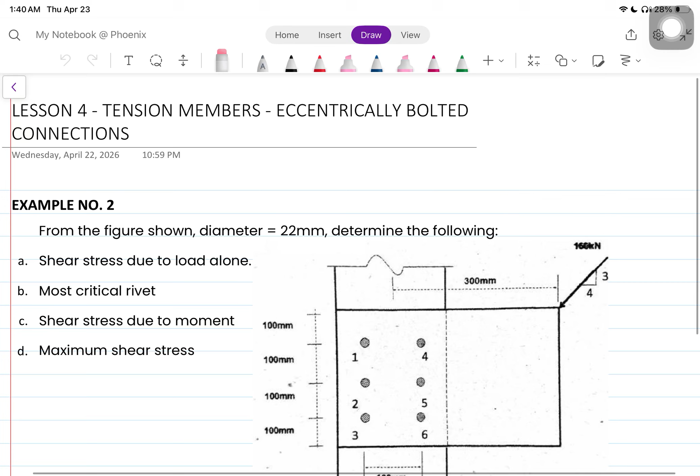Let us have another example for eccentrically bolted connection. This is example number 2. From the figure shown, diameter is equal to 22 mm. Determine the following: A, shear stress due to load alone; second, the most critical rivet; third, the shear stress due to moment.

Okay, so given to us is a slanted load with the load of 160 kilo Newton. Let me rewrite this, 160 kilo Newton. We already have the slope of 3, 4, and then the hypotenuse will be 5.

So we can solve first for the vertical and horizontal load of this. We need to get the components. Let us solve first for the vertical. Since it is acting downward, how do we solve for this? This is 160 times the slope of 3 over 5, and this will be equal to 96 kilo Newton.

And then for our horizontal load, since that will be acting to the left, this will be 160 multiplied by the slope of 4 over 5, and this is equivalent to 128 kilo Newton. Okay, so now for letter A, let's find that using due to load alone.

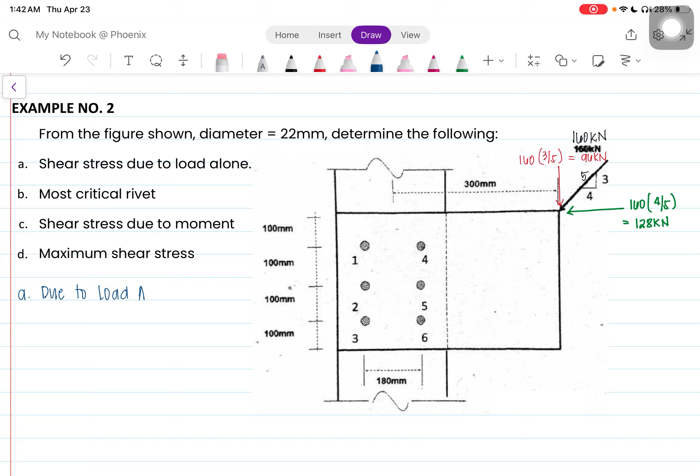How do we solve for that? We divide the total load by the total number of the bolts. So let's start with PH. We solve PH by taking 128 kilo Newton divided by the number of bolts, which is 6. So 128 divided by 6 is equal to

21.333 kilo Newton. Let us store this to letter A. Then, aside from PH, let us solve now for PV. How do we solve for PV? That is just equal to 96 divided by 6, and that is equal to 16 kilo Newton.

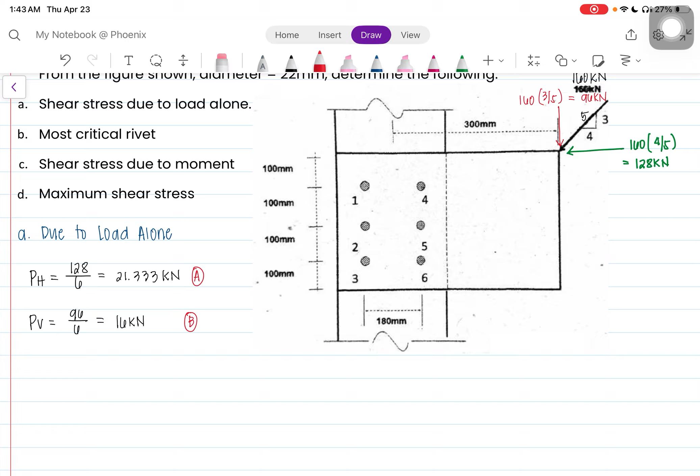Let's store this to letter B. Later we'll just use letters. But we're not done yet with shear stress due to load alone because we still have to solve for PD, the total PD. How do we solve for that? That is just the square root of PH squared plus PV squared.

Substituting the given values, where are they? They are at A and B. So that is A squared plus B squared, but don't forget, it's under a square root. Then we get the value of PD is equal to 80 over 3, or equivalent to 26.667

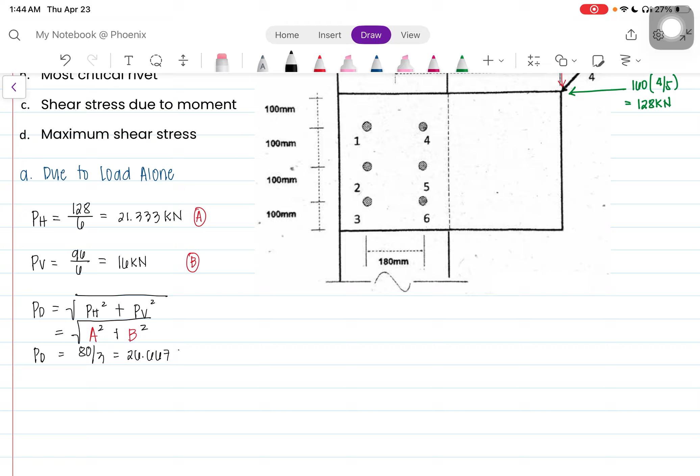kilo Newton. But take note, what is being asked from us? That is the shear stress. So we still have to solve for the shear stress. So to solve now for shear stress, that is just equal to

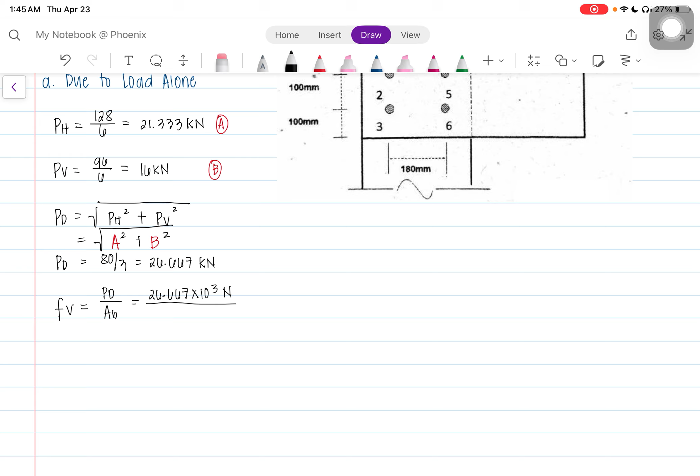PD over area of the bolt. What is our PD? That is 26.667, so take note, use the full value. Here I just wrote down what I noted. And since this is in kilo Newton, we multiply it by 10 cube to convert to Newton. Divide it by, okay, do we have the area of the bolt already? Yes, we have the diameter of the bolt, and that is 22 millimeter.

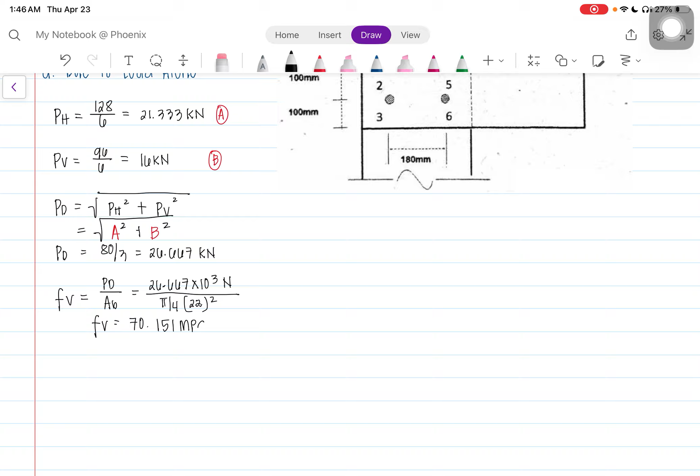So how do we solve for the area? That is just pi over 4 multiplied by the diameter squared. So with that, we can now solve for our FV, that is equal to 70.151 megapascals, and that is now our final answer for our FV.

Okay, let's also draw this out. What does our load look like? Here we have acting upward since the load is acting downward. So this is your PV, PV, PV, another PV, PV, PV. And then for our PH, since the load is acting to the left, it should be to the right here. So that is your PH.

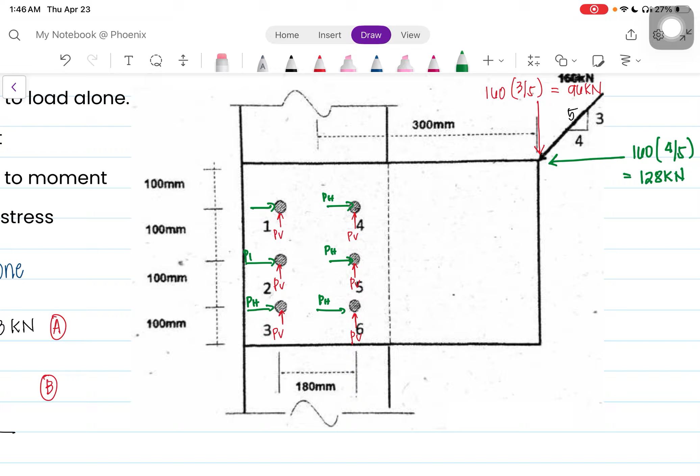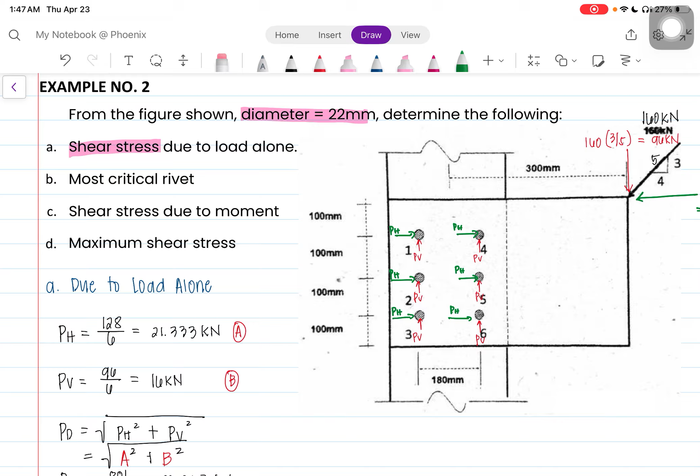Now, the next question to us is the most critical rivet. We can determine the most critical rivet by observation. First, we already have the load due to the direct load. Now for the moment. So to solve for the moment, to know how the rotation will be, let's first solve the value of moment. This means we go back to the question in letter B, the most critical rivet.

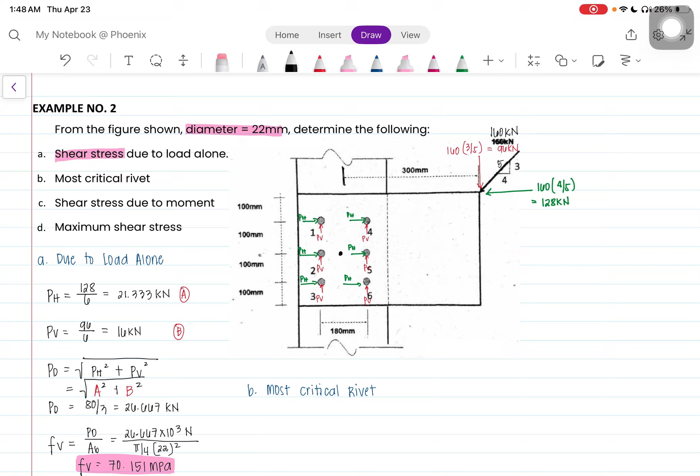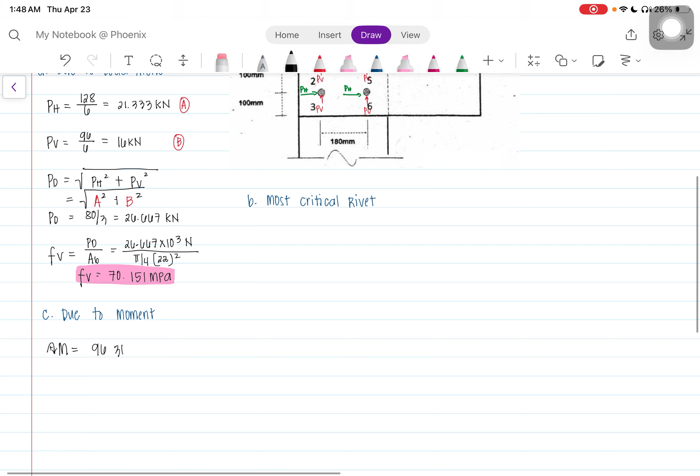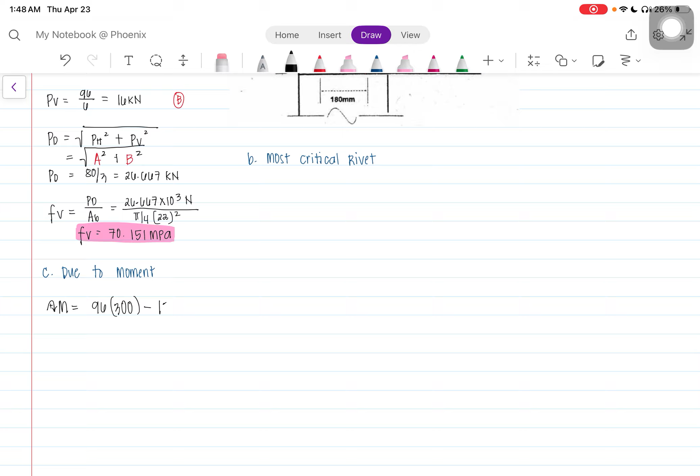So first, 160 kilo Newton acting downward, therefore that is positive. So that is 96 kilo Newton, and our eccentricity is given as 300 mm. Next, what about the 128 kilo Newton? Since that is against the rotation, therefore that is negative. And what is the moment arm? From here going to that side, we have 100 plus 100, so this is 200.

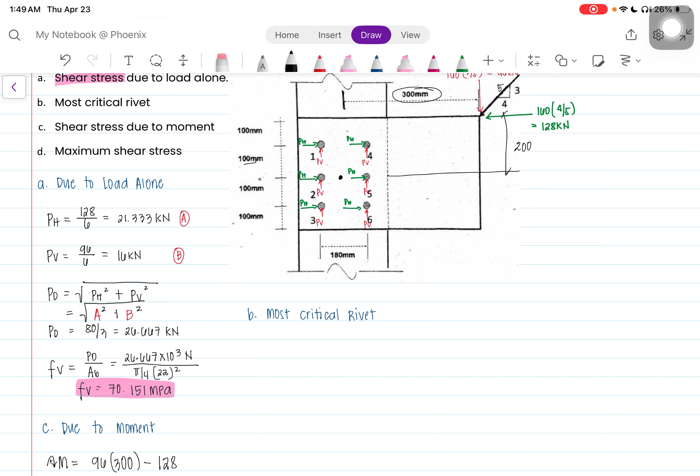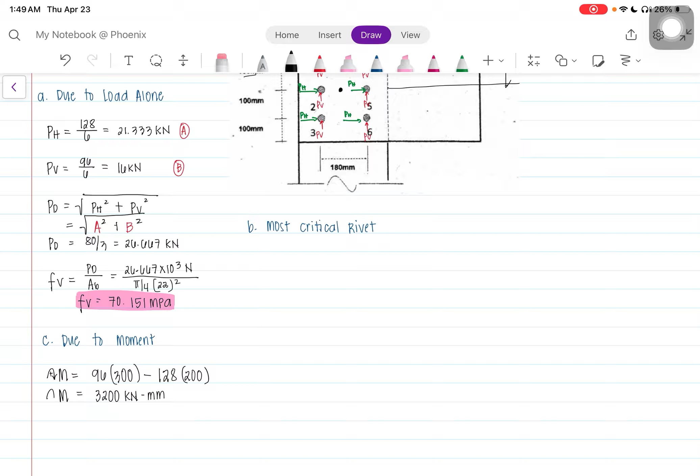So solving this, we get the value of M as positive 3,200 kilonewton-millimeter. Since it's positive, that means our assumption is correct that it is rotating clockwise.

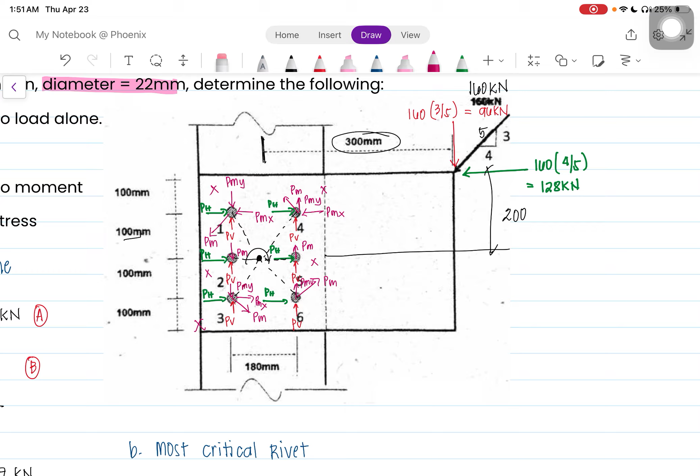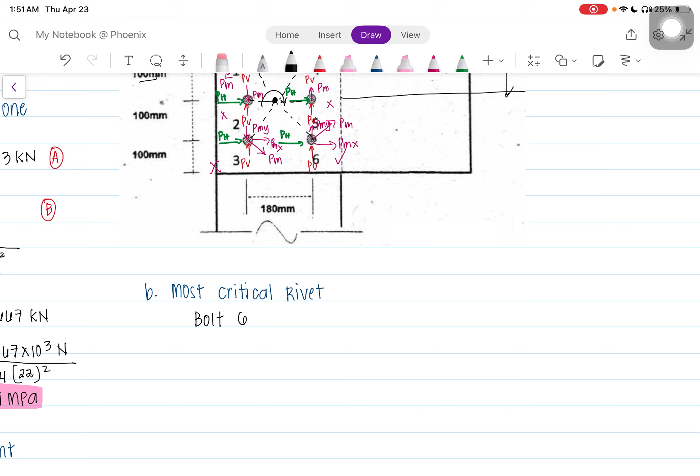Now last one, bolt 6. For bolt 6, PMY points upward, PMX points to the right. This means this is correctly our most critical bolt. So therefore, your most critical bolt is bolt 6. This is now our final answer for letter B.

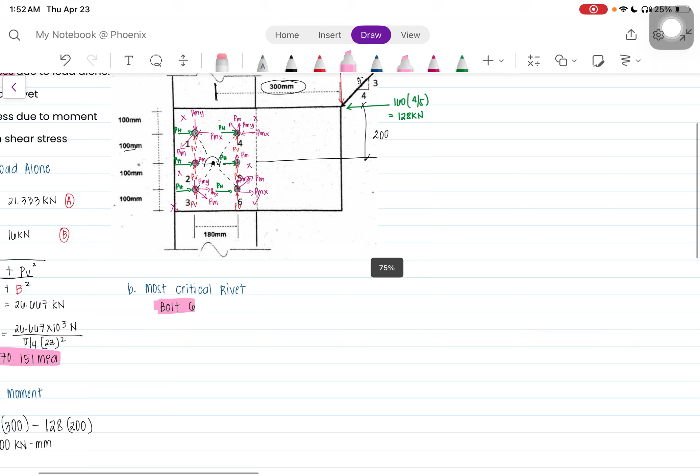So with that, we can now solve for M, for our shear stress due to moment. Before we proceed, let's solve now for J. How do we solve for J again? That is the summation of x squared plus y squared.

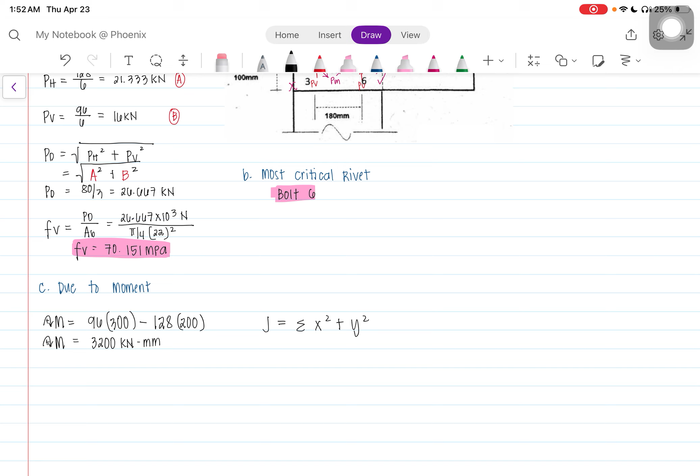For x, they all have the same distance, so we have 6 times. What is their distance? From center to center is 180, but since we halved it, that is 90. So we multiply this by 90 squared plus...

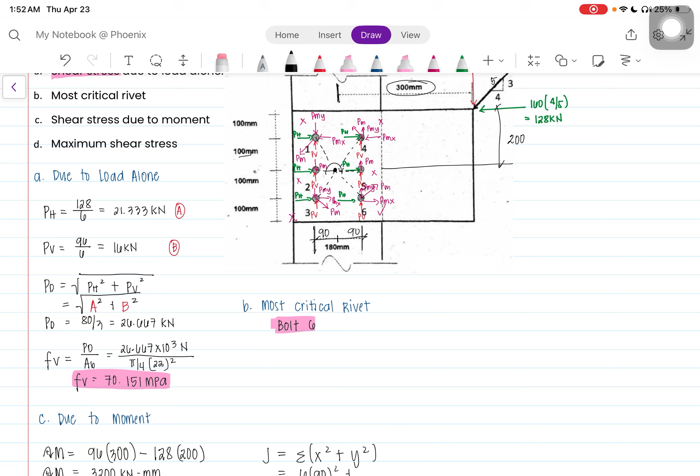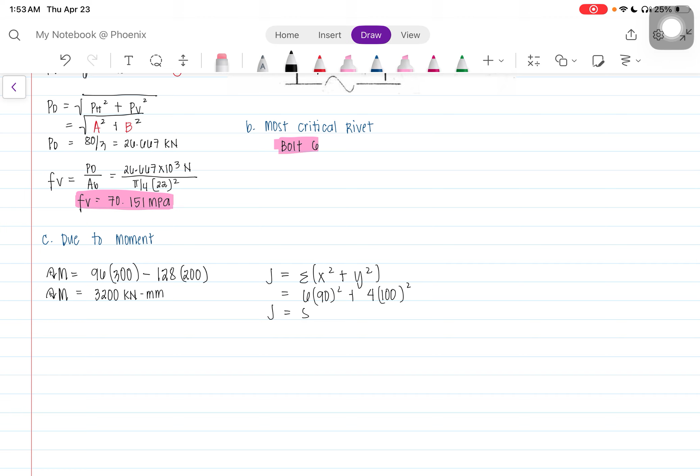For bolts 2 and 5, they both become 0. So we only have 1, 4, 3, and 6 with the same vertical value. So we have 4 times 100 squared. And we get the value of J as 88,600 mm squared. Then we can now solve for PMX.

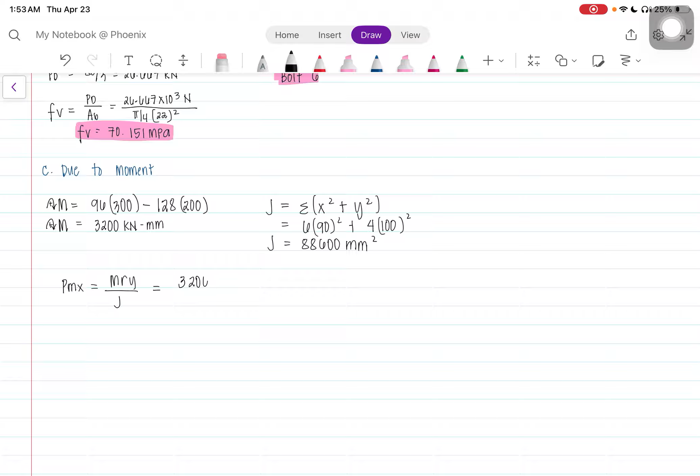Solving now for PMX, we have MRy over J. That is equal to, what is our M? That is 3,200, multiplied by Ry. What is our Ry? That is 100 mm, divided by our J, which is 88,600. And with this, the PMX we get is equal to 3.612 kilonewton.

We store this to C. Then we can now solve for PMY. Solving now for PMY, we have MRx over J. Still with moment 3,200 multiplied by x, that is 90.

Divided by 88,600. And the value we get here is 3.251 kilonewton. And since that's long, let's also store this to D.

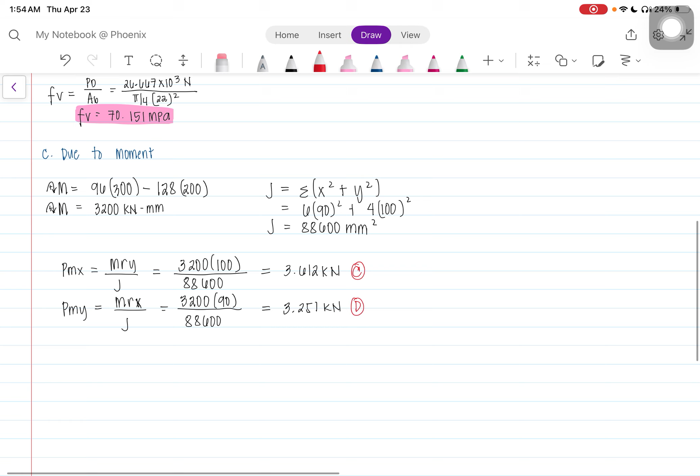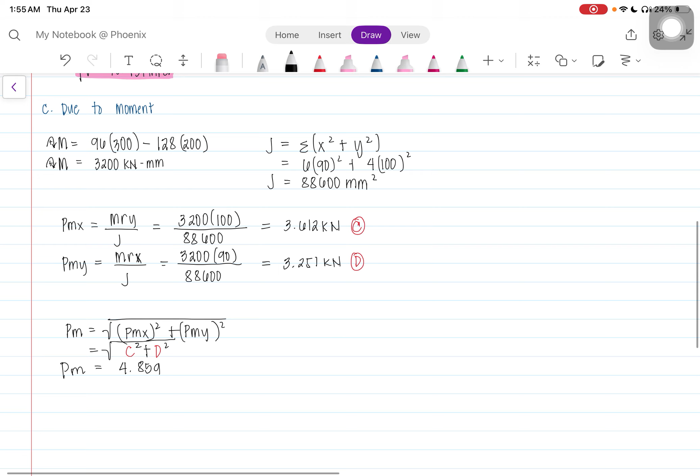But again, we're not done yet because we still have to solve for the resultant PM, right? So we have PM is equal to the square root of PMX squared plus PMY squared. So with this, where is PMX? It's at C. And where is PMY? At D. Then the value we get for PM is equal to 4.859 kilonewton. But again, what is being asked of us is stress.

So we still have to solve for the stress, but we know that stress is just equal to PM over area of the bolt. To solve for this, the PM we got is 4.859. Again, please use the complete answer. And then since this is in kilonewton, we just multiply it by 1,000 to convert to newton. And we divide it by the area of the bolt.

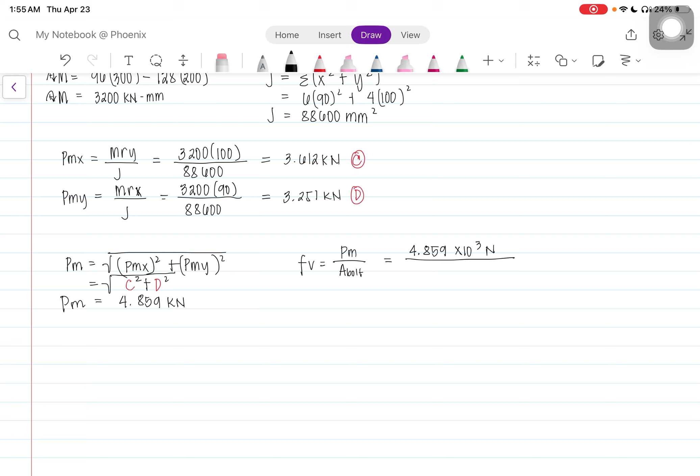So that is pi over 4 times 22 squared. So we get FV equal now to 12.783 megapascals. And that is now our final answer for letter C.

And lastly, what are we asked to find? Maximum shear stress. So to solve for this one, we just use the formula: Pmax is equal to the square root of the summation of horizontal forces squared plus the summation of the vertical load squared.

So we have H. Where is our first H? At A. And where is our second H? At C. So this means we just add C. And then plus, where are our Y values? At B and at D. So we have B plus D squared. And we can now solve for Pmax, and what we get here is equivalent to 31.509 kilonewton.

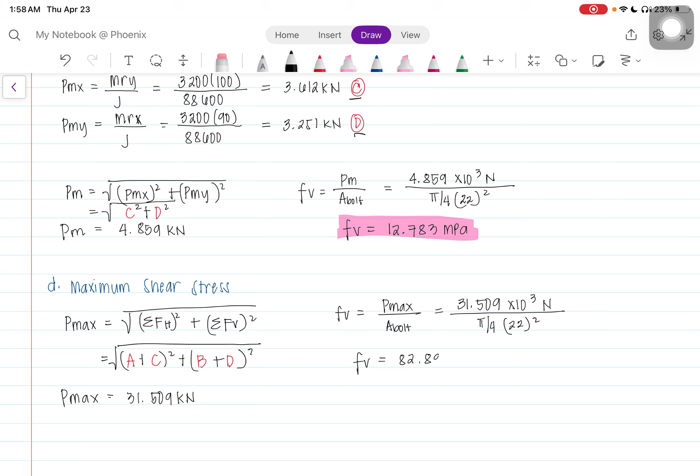But again, we are talking about the stress, so we solve for stress using Pmax over area of the bolt. So we have 31.509, and since this is again in kilonewton, we multiply it by 1,000 to convert to newton. Divide it by the area of the bolt, which is pi over 4 times 22 squared. And the stress we get is 82.890 megapascal. And that is now our final answer.